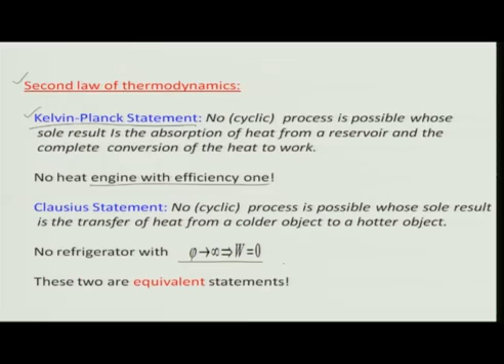Second is the Clausius statement, another version of the second law equivalent to the Kelvin-Planck statement, but it refers to the refrigerator. It tells us I cannot have a refrigerator whose coefficient of performance is infinity. That means I cannot construct a refrigerator which absorbs heat from a cold reservoir and dumps the entire amount of heat to a hot reservoir. It is not possible. I have to do some work on the refrigerator to make it work in a closed cycle. Then I talked about the Carnot engine, which is a reversible engine.

I told you repeatedly what I mean by a reversible engine: dissipationless. The working substance I chose to be 1 mole of ideal gas, but we discussed this is not essential. Ideal gas specific heat is independent of volume, temperature, and any other quantities. It is 3/2 Nk if I consider 1 mole of monoatomic ideal gas. In that case the calculation becomes very simple.

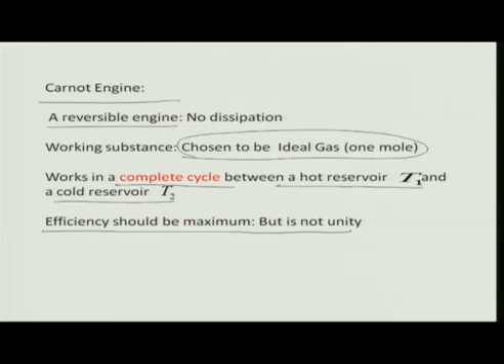The engine works in a complete cycle. What was important? There was a hot reservoir at temperature T1 and a cold reservoir at temperature T2. Efficiency should be maximum, but we calculated the efficiency, and it was not unity. The Carnot engine was operating in 4 processes: isothermal expansion, adiabatic expansion, isothermal compression, adiabatic compression. This brings me back from P1 V1 T1 to P1 V1 T1. I complete a closed loop in my PV diagram, a closed loop.

There were a few comments. These processes can be executed in any order, ensuring the initial and final states are the same: P1 V1 T1 initially, P1 V1 T1 finally. We calculated the work done and heat absorbed, and internal energy being a state function, its change is 0. So we did not really care about the internal energy.

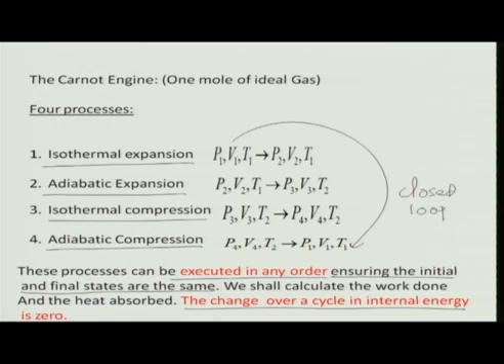So what did we find out? What is the remarkable result? The remarkable result is the following: efficiency is 1 minus T2 by T1. T1 is the temperature of the hot reservoir, T2 is the temperature of the cold reservoir, and the engine is operating in a closed loop, extracting heat from the hot reservoir, dumping heat to the cold reservoir, in the process doing work W. This efficiency cannot be unity, because then you would have to set T2 equal to 0, and T2 equal to 0 you cannot set, which is why efficiency is finite, but it is maximum.

So then we proceeded to discuss the Carnot theorem. Given two heat reservoirs, meaning T2 and T1 fixed, a Carnot engine has the maximum efficiency. Any irreversible engine will have less efficiency than the Carnot engine. Furthermore, the efficiency of all reversible engines working between two given reservoirs, with T1, T2 fixed, is the same. Secondly, it is independent of the working substance or the operational details, the way I executed my thermodynamic operations. This is what I called the Carnot theorem.

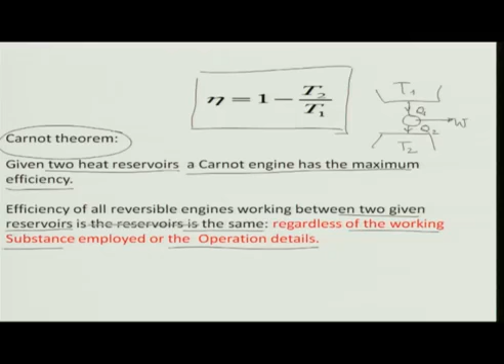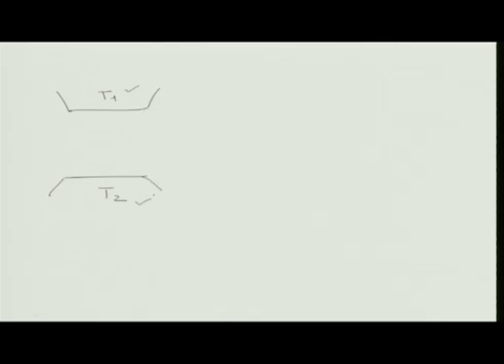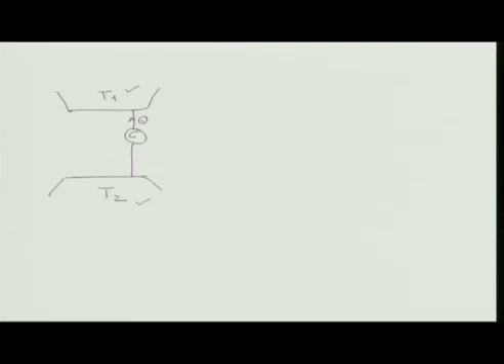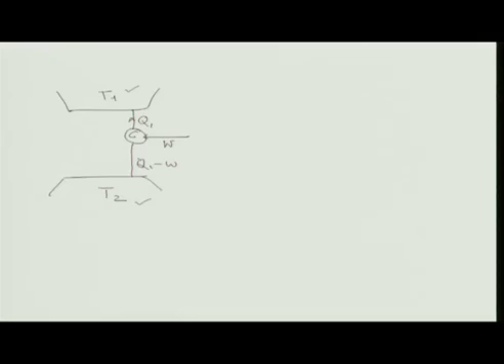And I gave you some argument regarding this Carnot theorem, as follows. I had two given reservoirs, with temperatures T1 and T2, one hot and one cold. I ran two engines, one is Carnot. The Carnot engine was being operated as a refrigerator, and then in parallel, within the same reservoirs, I had an irreversible engine.

This picture reminds us what we were doing. Carnot operated as a refrigerator, absorbing Q1 minus W amount of heat from this reservoir, dumps Q1 amount of heat to the hot reservoir. Whereas the irreversible engine extracts Q1 amount of heat from the hot reservoir, does W prime amount of work, and releases the rest, Q1 minus W prime, to the cold reservoir. So that was the situation.

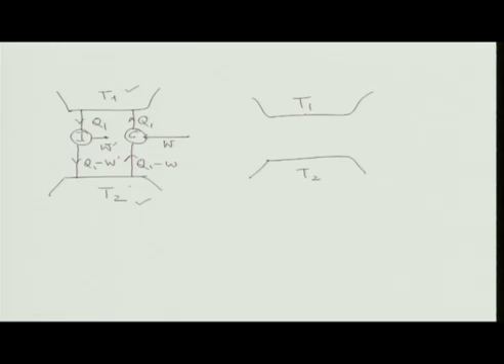I argued that these two taken together actually work as an engine which absorbs W prime minus W amount of heat from this reservoir and converts it entirely to work.

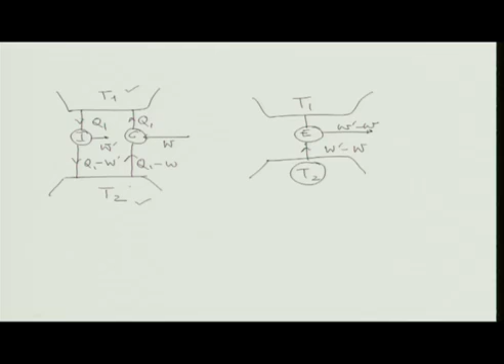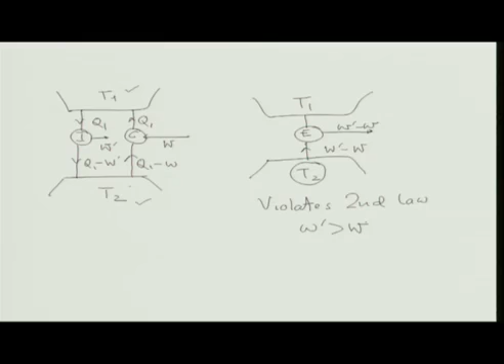Then we argued it is not possible, it violates the second law. If I assume W prime is greater than W, the argument was W prime cannot be greater than W. So W prime is never greater than W. If W prime is greater than W, I violate the second law—this system violates the second law. This was the argument.

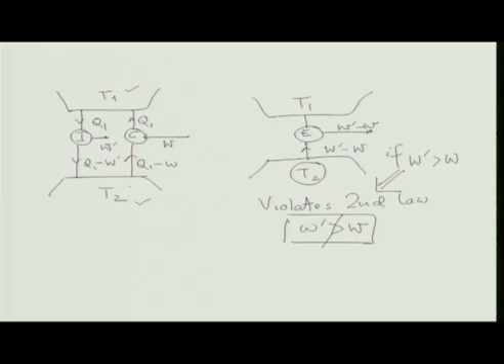Once we convinced ourselves that W prime cannot be greater than W, we proceeded, and a series of mathematical arguments told us that the efficiency of the Carnot engine is greater than the efficiency of the irreversible engine. That is the summary: we cannot have W prime greater than W because that makes the second law violated. Hence eta C must always be greater than eta irreversible. That is the summary of whatever we did in the last lecture.

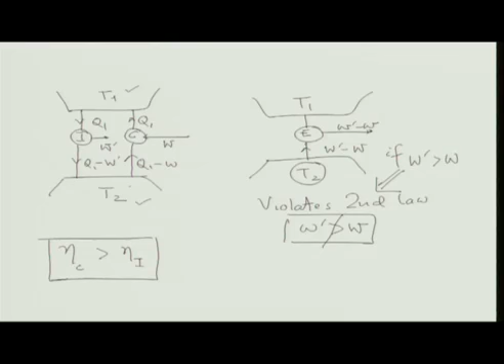Let me now proceed and give you some concepts, some notions which are different, slightly advanced, but I told you in the beginning these topics, like entropy which I am going to introduce, will be very useful for further studies, and of course for understanding thermodynamics by heart.

Entropy. So far we have been talking about thermodynamic variables: U, internal energy, volume, temperature, pressure—some of them extensive, some intensive. We discussed what I mean by extensive at length. Now I bring in a new thermodynamic variable which I call entropy. It is an extensive thermodynamic variable.

Entropy, if I consider, let us say, an isolated system, is just a name—do not get baffled by these names. What does an isolated system mean? It means my system plus reservoir; system and reservoir taken together constitute an isolated system. So entropy can be written as a function of U, internal energy, N, number of particles, and V, volume of the container. So this is entropy.

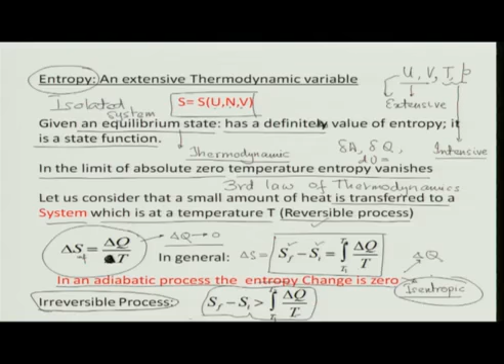In some sense, you will find the statement that entropy is loosely related to the randomness or disorder of the system, and we lose information about the system when entropy increases. What do I mean by that?

Let us take 3 energy levels, like Bohr levels, which an electron can occupy. If I know with probability 1 that the electron is in level 1, then entropy will be 0. But if there is a finite probability of the electron being in level 1, level 2, or level 3, then entropy is greater than 0 — a positive value — but at the same time I am losing information. When I knew for certain that the electron was in level 1, entropy was 0. As the probability of occupying other states increases, entropy increases. That is why we lose information about the system when entropy increases.

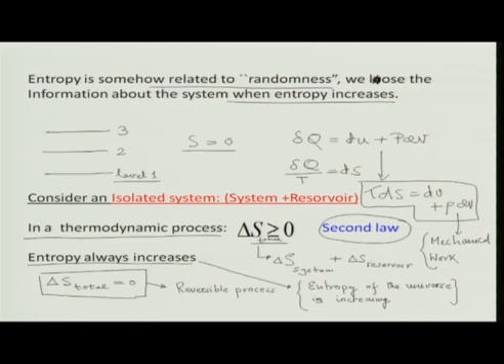Then I will talk about something called the TS diagram. That means thermodynamic processes are to be drawn on the TS plane rather than the PV diagram or VT diagram. It is useful, and you can see why it is useful, because we have talked about two processes so far, at least in the context of the Carnot engine. What are these two processes?

Now, the TS diagram is useful in the following sense, which I will argue. In the PV diagram, the area under the curve provides the work done on or by the system, that we have learned. The TS diagram, on the other hand, as you will see in a closed loop, will provide you the net heat exchange. This you can easily argue, which I will not show the argument here.

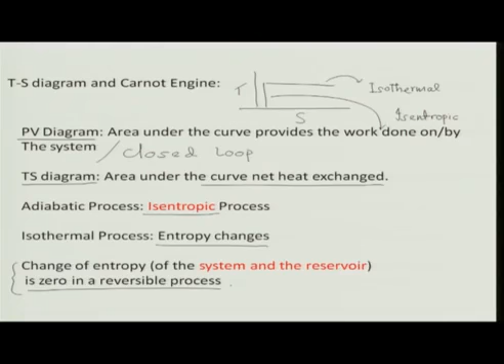I have already told you: adiabatic process, isentropic process, isothermal process, entropy changes keeping temperature fixed. Remember, this is very important. Change of entropy of the system and the reservoir both taken together is 0 in a reversible process.

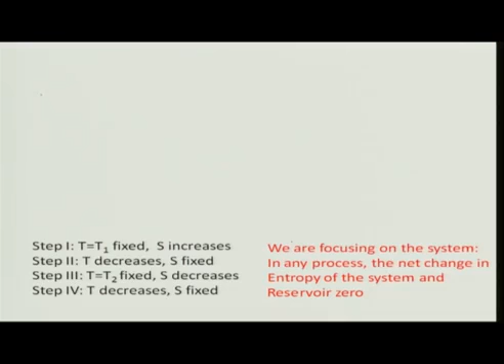So with this input we will start to proceed with the Carnot engine and draw the TS diagram for a Carnot engine. Let us recall the PV diagram. So this is my PV diagram. This was my step 1, step 2, step 3, step 4. I was starting from P1, V1, T1.

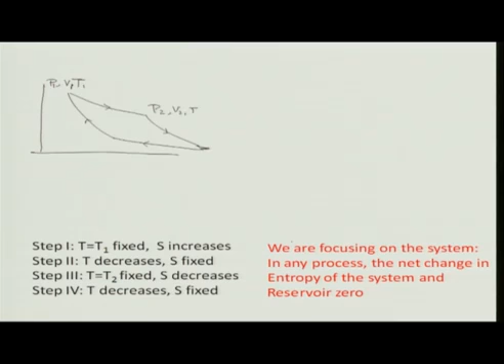This is an isothermal process that takes me to P2, V2, T1, followed by an adiabatic or isentropic process. So that takes me to P3, V3, T2. Here I reach the temperature of the cold reservoir. Then there is a contraction which takes me to P4, V4. This is again an isothermal process, this is T2. Then an adiabatic contraction takes me back to P1, V1 and T1.

So this is my isothermal, this is my adiabatic, again isothermal, again adiabatic, heat absorbed Q1 and heat released Q2.

Now we will draw the TS diagram for this corresponding Carnot engine. We should proceed to draw the TS diagram for this Carnot engine. So this is your T, this is your S. I am plotting temperature as a function of entropy, or the other way around.

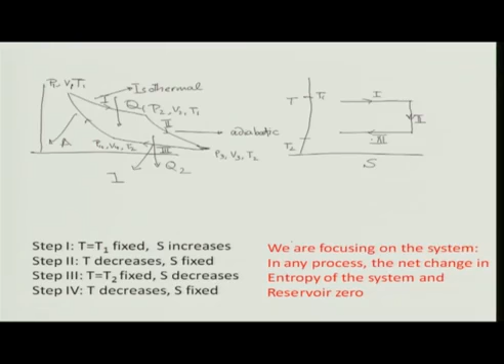Followed by an adiabatic expansion in which entropy cannot change. So this is step 1, this is step 2 which corresponds to step 2 here. Then this is step 3, isothermal process, but it was a compression, that is why heat was released, Q2 amount of heat, and entropy decreases but comes back to this value, then you have an isentropic or adiabatic process which is step 4. This gives me step 4 here. Okay, I should draw it here rather. Okay, so you see that

the TS diagram for a Carnot engine, this is the PV diagram, and this is the TS diagram of the Carnot engine. You see, TS diagram looks much simpler only because isentropic processes are straight lines like this and isothermal processes are straight lines like this. You see, you have a rectangle. You had a complicated geometry here, instead in TS diagram you have a rectangle.

So now how can you calculate the efficiency? Remember this curve and this curve, these two, there is no entropy change, because 2 and 4 are adiabatic processes and there is no heat exchange. So now step 1, heat absorbed is Q1, temperature was maintained at T1, the temperature of the hot reservoir. So delta S1 is equal to Q1 by T1. Adiabatic process steps 2 and 4, delta S is 0.

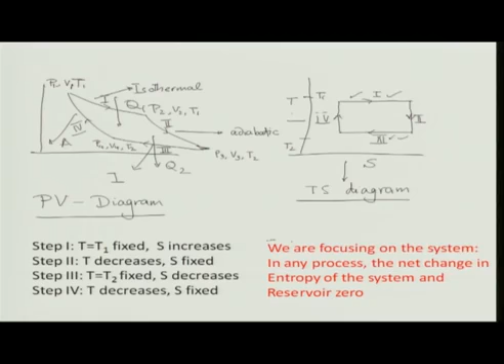Now remember, I should tell one statement very clearly. We are focusing on the system. In any process, the net change in the entropy of the system plus reservoir is 0. That means here entropy of the system is increasing, but reservoir is losing heat, its entropy is decreasing, and total entropy change is 0 because it is a reversible process. Similarly here entropy of the system is decreasing, but entropy of the reservoir is increasing because system is releasing heat to the reservoir. But it is a closed loop. So TS diagram was giving me a closed loop. I come back to the same position.

So in the closed loop, net change of the system is 0. Also, add them, you will always find out total change of the system plus reservoir is equal to 0. So S total of the system is Q1/T1, this quantity, Q2/T2, which is this quantity, which should be equal to 0. So Q1 by Q2 is equal to T1 by T2. So what is the efficiency? Efficiency is 1 minus Q2 by Q1, which immediately gives me 1 minus T2 by T1.

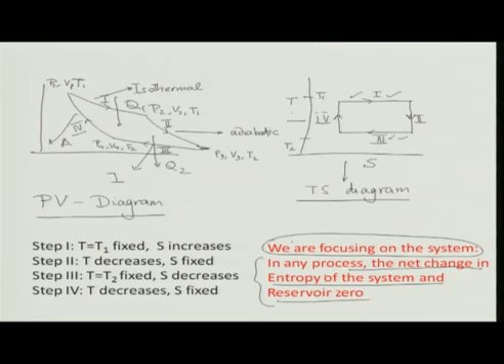So that is the purpose of this discussion. I told you that if I use TS diagram instead of PV diagram, I have these processes represented by straight lines in the TS diagram, okay. And then immediately I can work out the efficiency of a Carnot engine, which is given by 1 minus T2 by T1. So same result we obtained using the TS diagram, okay.

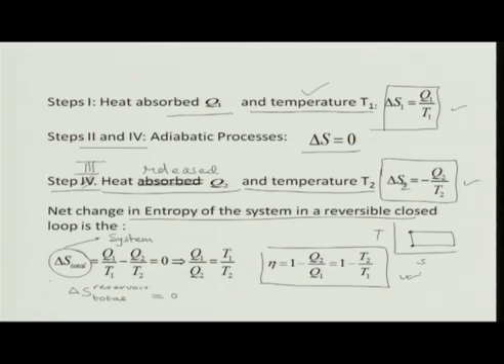This is all I wanted to say about entropy, but today's lecture, still we have some time left. I would like to do some problems for you and give you some food for thought so that you can learn on your own few advanced topics.

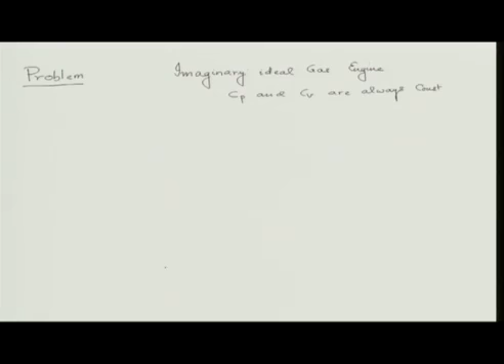So first let us do a problem. This problem is quite an illustrative problem which involves an imaginary ideal gas engine, and the assumption I will make is Cp and Cv are always constant. And now let us draw the corresponding PV diagram, and I leave it to you to construct the TS diagram. So PV diagram is the following.

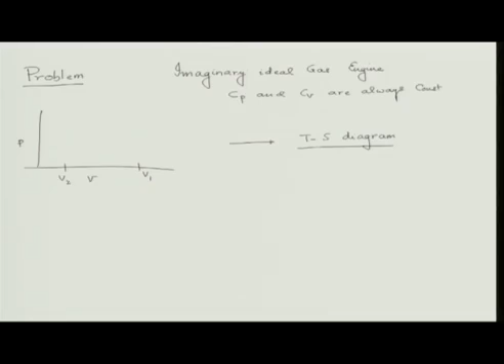There is a V1, there is a V2, there is a P1, let us say P1 and P2. There is a process which is like this, and there is a process which is like this, and there is a process which connects these two. The slope should be monotonic, my drawing is bad, rather it should be like this. I erase the upper curve, okay. So immediately see that what is this process? This keeps your pressure constant. So this is isobaric.

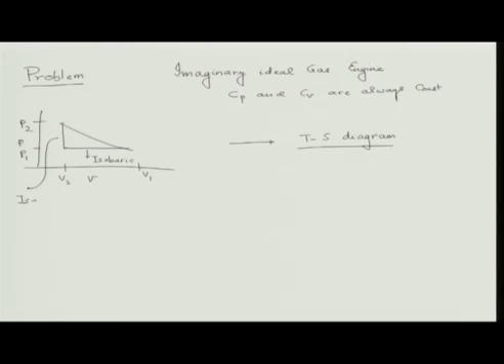This is obviously volume constant, so this is isochoric. And finally this is my isentropic or adiabatic process. I ask you the question, I put the arrows like this: isobaric followed by isochoric, and then finally adiabatic.

I ask you a very simple question: calculate the efficiency of this. Calculating efficiency is not difficult, you have to calculate the work done. First remember, in this process V is kept fixed, so work done is 0. Whatever work done will be here and here, but I will not calculate it, I leave that for you to work out, since we already know how to calculate work done for both isobaric and adiabatic processes.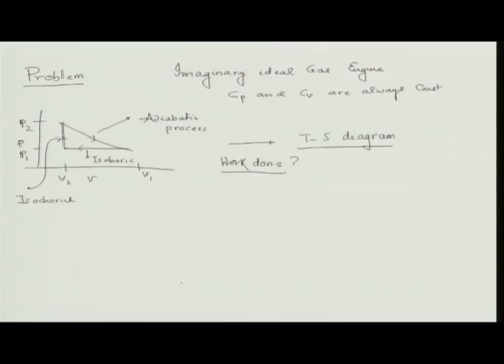I would rather calculate Q1 and Q2, let us see the heat absorbed. Heat absorbed in which process? Here you see pressure is increasing, which means temperature is increasing. Let us call this temperature T1, this temperature T2, and this temperature T3. Now, in this process, how much heat will be absorbed? Cv times T3 minus T2. T3 must be greater than T2 because pressure is increasing.

Keeping volume fixed, this is the process involved in heat absorption. Now heat released should be this process. I am referring to the magnitude of it. This should be where pressure is kept constant, so Cp times T1 minus T2. It is negative T2 minus T1, but I am referring to the magnitude only. So remember, this is heat released.

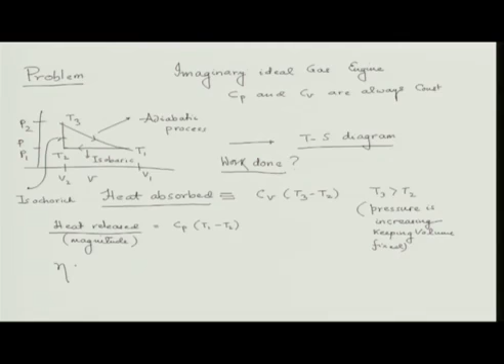Now, once I have heat absorbed and heat released, I can immediately calculate the efficiency of my engine. Efficiency will then be given by 1 minus Q2 by Q1. This is my Q2, remember again it is the magnitude. So remember what is the engine: ideal gas engine, and Cp, Cv I have assumed constant, which does not depend on anything, as happens for an ideal gas.

So now you have one isobaric process, one isochoric process, one adiabatic process. I asked you to calculate the work done, that will be in this process and this process, no, volume is kept fixed. Second, find out the TS diagram, the PV diagram I have given. So I calculated heat absorbed, heat is absorbed in this process because keeping volume fixed I am changing pressure. You know, if I keep volume fixed, P is proportional to T, pressure increases means temperature increases, and the heat absorbed will be Cv times T3 minus T2.

I have assigned temperatures. Now, heat is released in this process because it is isobaric, volume is decreasing keeping pressure constant, so T2 will be less than T1. I have written the magnitude of the heat released as Cp times T1 minus T2, which is Q2.

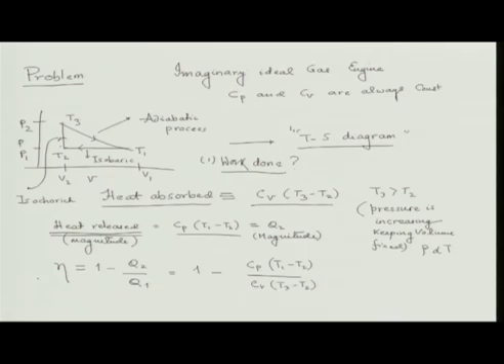Now let me try to calculate the efficiency: 1 minus Q2 by Q1, which is nothing but 1 minus Cp times T1 minus T2 by Cv times T3 minus T2. This gives me the answer, but it is not a very good answer because the problem gives me V1, V2, P2, P1 — it does not give me T1, T2, T3.

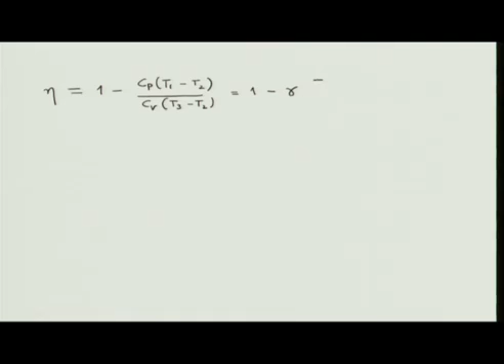So I should be able to express everything in terms of given quantities in the problem. So let us proceed. Efficiency I can write as eta equals 1 minus Cp times T1 minus T2 by Cv times T3 minus T2, which I can simplify as 1 minus gamma times T1 minus T2 by T3 minus T2.

Okay, we have written these previously, but this does not give a very nice result. As I told you, I have to express it in terms of P1, P2, V1, V2. You can easily see from here, since it's an ideal gas, I will always have PV equal to RT satisfied. So I will have T1 equal to P1 V1 over R. Similarly, T2 I can write as P1 V2 over R. T3 similarly I can write as P2 V2 over R.

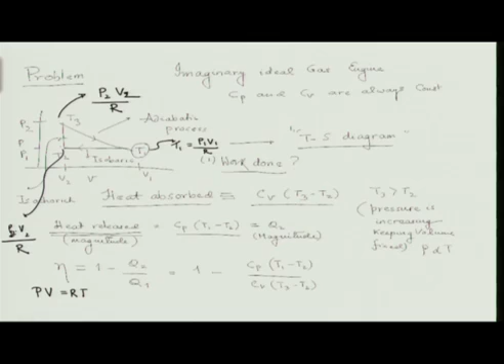I am going to substitute this. This is P2 V2 as per my notation, this is P1 V2 by R, this is P1 V1 by R. So let me substitute in this expression and see what I get. Efficiency eta will be given by 1 minus gamma times P1 times V1 minus V2, over V2 times P2 minus P1. So all I have done is replaced temperature, substituted for temperature for 1 mole of ideal gas. I always have PV equal to RT satisfied, and I know the coordinates of the points denoted by temperatures T1, T2 and T3 respectively.

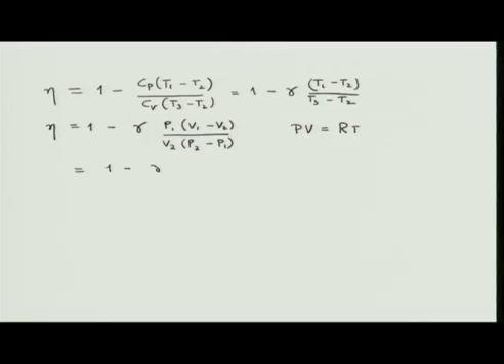So immediately one can simplify life and write out the final expression, which is V1 by V2 minus 1, upon P2 by P1 minus 1. This is the efficiency of the engine I have been talking about. This is one example of doing a problem using the simple PV diagram.

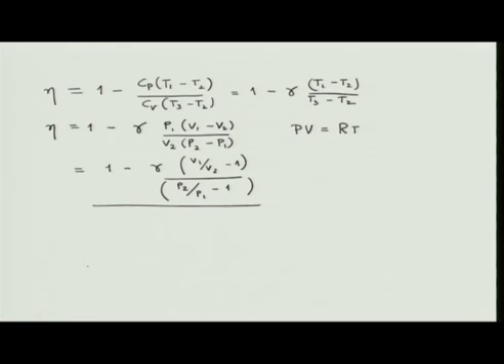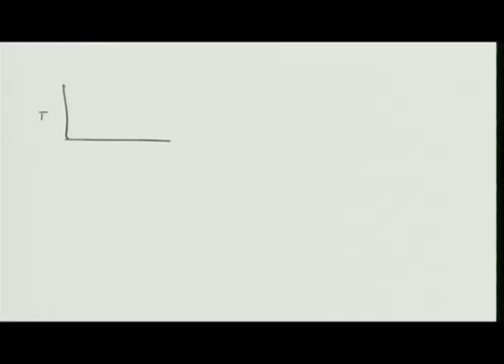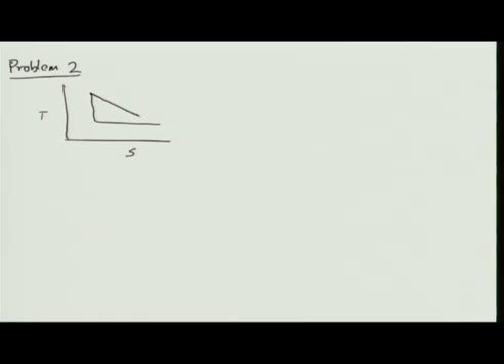To end this discussion I will have two more comments and leave two problems for you to do. For example, if I give you a TS diagram, not a PV diagram, this you can call problem 2. Here you have a TS diagram and I give you three processes, all straight lines. Let us say my arrows go like this, this, and this. I ask you to identify the processes.

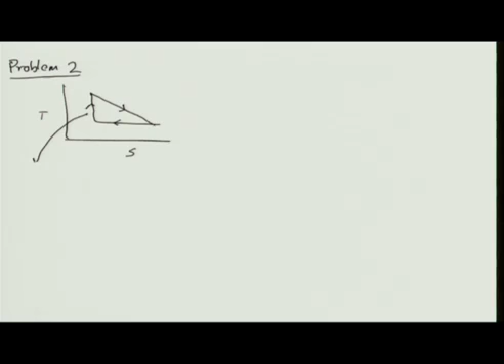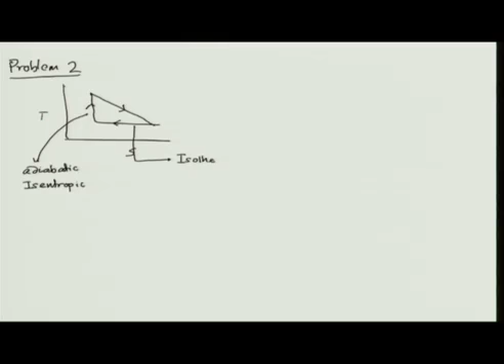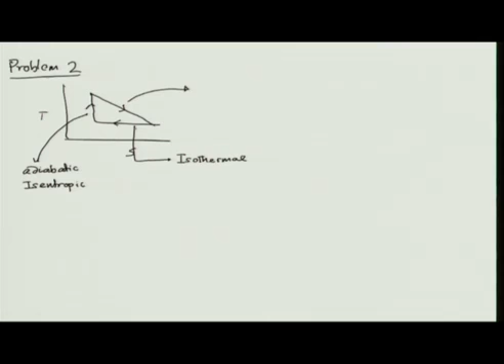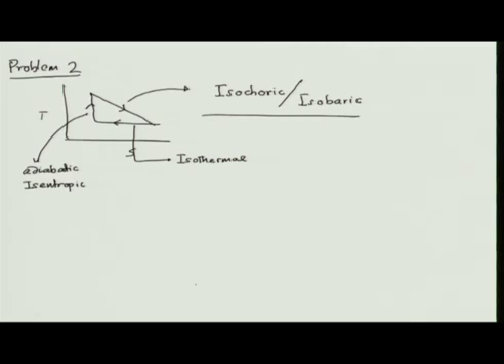This one you immediately know entropy is not changing, temperature is, so this is adiabatic or isentropic. What about this one? This we can easily find out because temperature is constant, so it is isothermal. This process, what is this? It is not adiabatic, it is a straight line I have drawn. So this process can be isochoric or isobaric, or it could be any other composite process, which you can figure out from the corresponding PV diagram.

However, what is important here is, given this cycle, calculate the efficiency of this engine. That you should be able to do from the TS diagram itself. Now you may ask me how to distinguish between an isobaric and an isochoric process on a TS diagram. This is what I am going to discuss now.

In a PV diagram, you can always identify which one is adiabatic, which one is isothermal, by looking at the slope. In a TS diagram, identifying isothermal or adiabatic/isentropic is very easy. What about isochoric and isobaric? They will have a different slope.

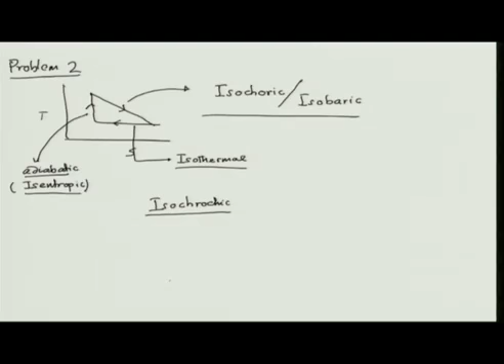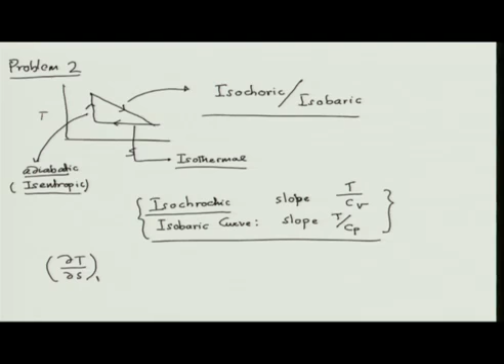So the comment I would like to make is that you should note the following: for an isochoric curve, if you calculate the slope, it is T over Cv. For an isobaric curve, the slope will be T over Cp. Remember, this is with respect to the TS diagram. So, del T del S, change in temperature with entropy, if volume fixed, is greater than del T del S over P. The slope of the isochoric curve is higher because Cv is smaller than Cp.

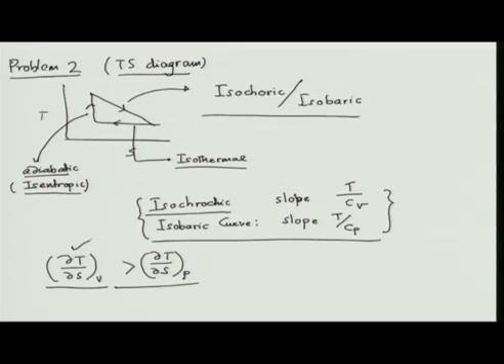So if I give you two curves, you should immediately be able to tell me this is isochoric, this is isobaric, remembering I am referring to the TS diagram. So problem 2 involves identifying processes in a TS diagram and calculating quantities. Adiabatic and isothermal are very easy to find, whereas for isochoric and isobaric, once again draw two curves, look at the intersection, and find the slope. From the slope, see whether this condition is satisfied or not.

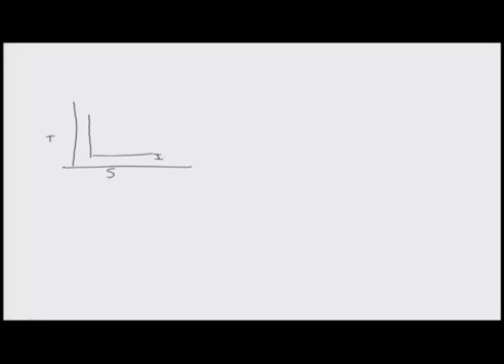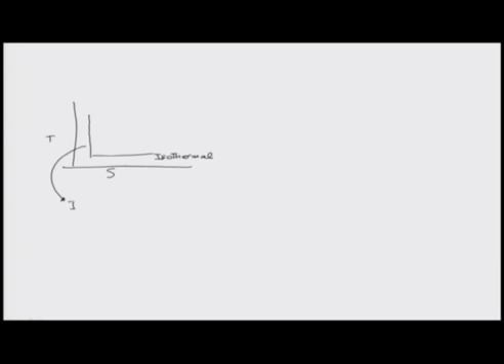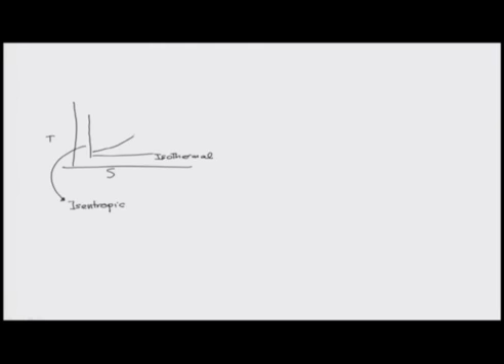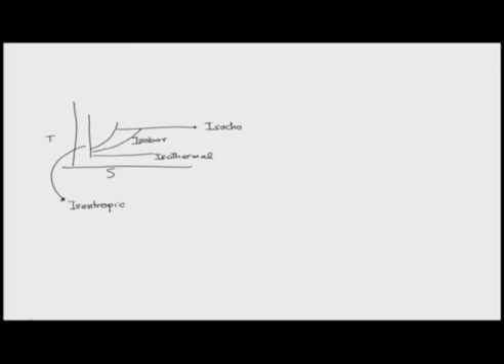If it is, you know the one with higher, steeper slope will be your isochoric process. To summarize, if I have a TS diagram: this horizontal curve is obviously isothermal, this one is isentropic, and there will be an isobar and an isochor. This will be the isobar, and this will be the isochor. That is what I have discussed based on the argument given previously.

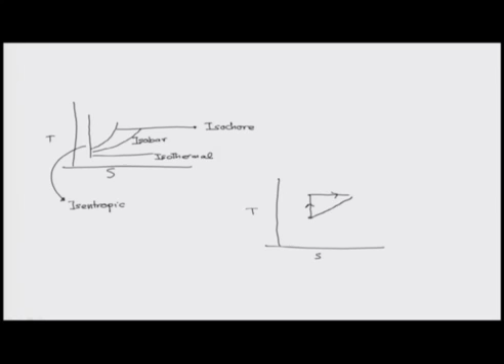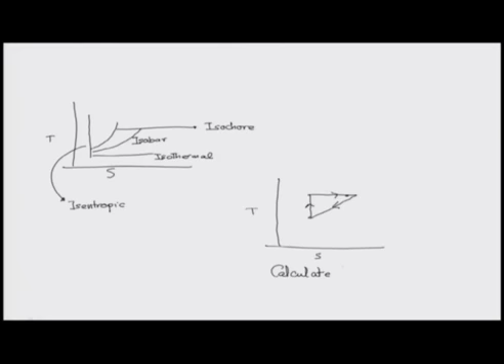So let me conclude by giving you one more cycle in the TS plane, which is following, very close to the cycle I drew in the previous slide. Again the question will be to calculate the efficiency, from the TS diagram itself. I can say this is T1, if you like, and this is T2.

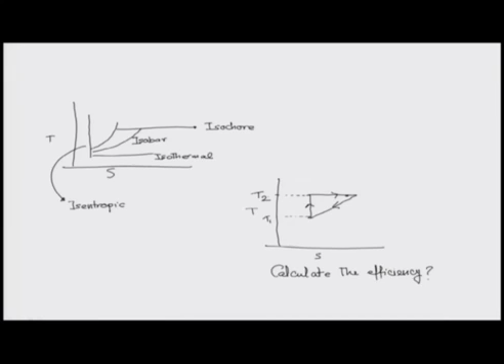So this is where I would like to end this set of lectures on kinetic theory and thermodynamics. I have followed two books, the NCERT book and the book by Professor H.C. Verma, plus some material not covered in standard books, to give you insight into problems, some of which are quite deep. If you understand them thoroughly, you will learn the subject better. The purpose was to show you the microscopic origin of kinetic theory and the macroscopic origin of thermodynamics, but eventually all should lead to the same results. We have been using PV equals RT for one mole of ideal gas throughout. So two different approaches, but fundamentally we want the same set of results, which are experimentally verified and reproducible in our laboratories. This ends our class lecture sessions on kinetic theory and thermodynamics. I thank you all very much for your attention.